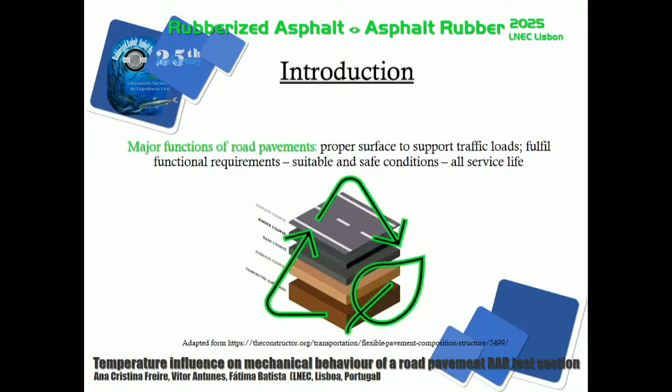Well, just a brief introduction. Everyone here is related to pavement, road pavement, circular economy, etc. But let me say something about it, just to have some connection with all the study. As we all know, major functions of road pavements are to provide a proper surface to support traffic loads and fulfill functional requirements, and of course structural ones also, and suitable and safe conditions during all service life.

So the main goals of our study regarding development and validation of alternative and innovative materials intend to give some answers to an issue that has been present in our lives in the last, let's say, 10, 20, 30 years regarding resource scarcity, environmental sustainability, to explore proper alternatives through the application of recycled aggregates, industrial waste, biomaterials, polymers, in order to protect all the finite resources.

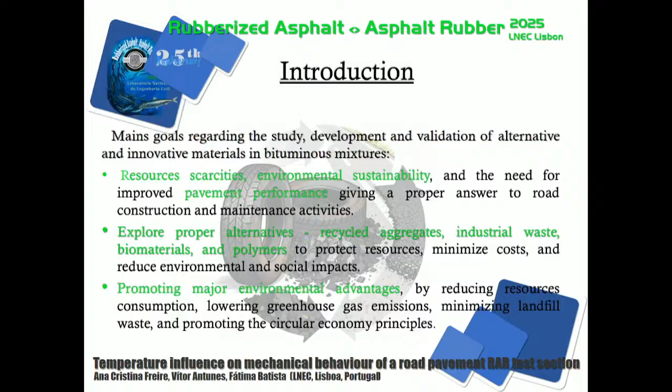That's the issue. So we have to promote major environmental advantage, reducing, that's the main goal, reducing resource consumption, and also, as we have been talking about all these 3 days, lowering greenhouse gas emissions. So we arrived to RAR, the reacted and activated rubber, that is composed of neat soft bitumen, a fine grinded crumb tire rubber, and active fillers. That was part of the mixture that we characterized in this study.

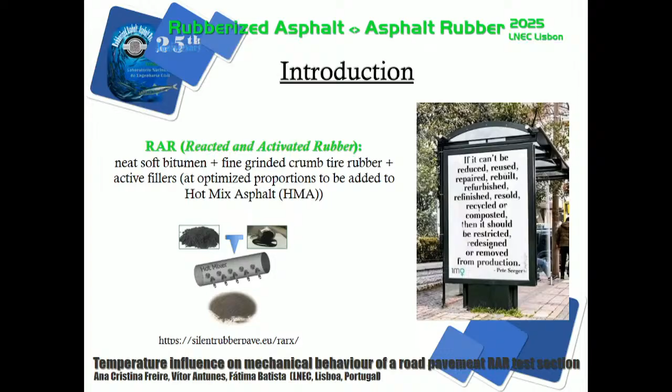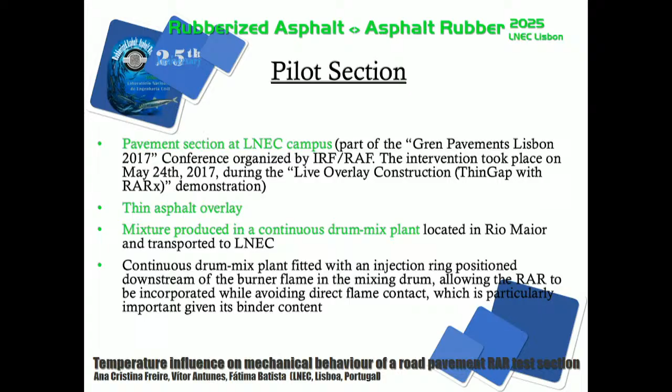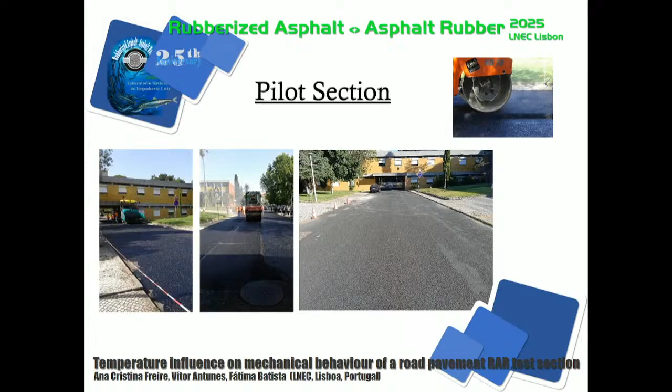So the pilot section was constructed here at LNEC in 2017, perhaps some of you were here during the conference organized by IRF. If you remember, the test section was done outside by Tecnovia at the moment. It is a thin asphalt overlay, and the mixture was produced at the continuous drum mix plant at Rio Maior and was transported, laid down and compacted here at LNEC. And here we can see some moments of that application, compaction here. You have seen it. It still has, as we expected, a very good aspect. All of you can do visual inspection here.

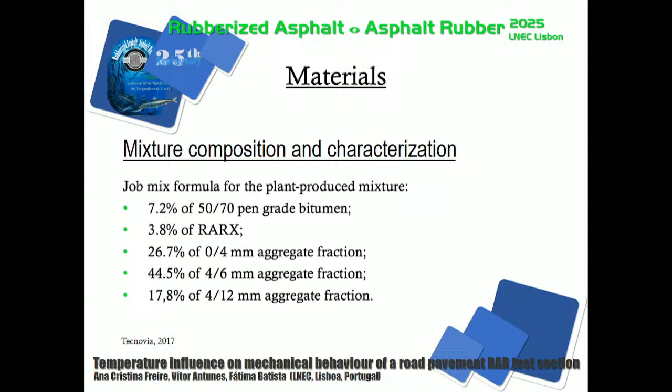And these were the materials that compose the mixture. Here we have the job mix formula. It has 7.2% of a pen grade bitumen 50/70, RAR-X 3.8%, and also three different fractions of aggregates. Those are the characteristics, the grading of the mixture. It was an SMA11.

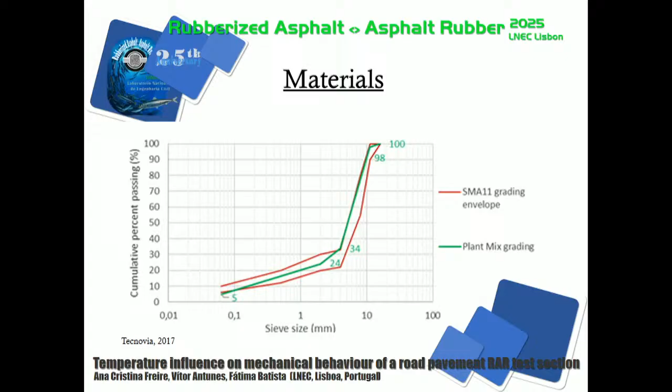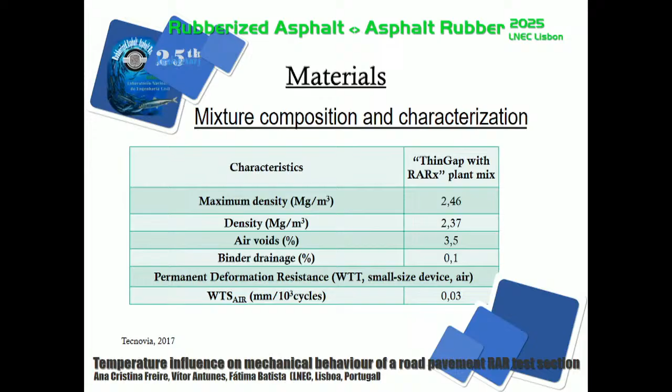And here we present also some characteristics that were provided by Tecnovia during the formulation of the mixture that was applied in the test pit. You have the density, the air voids, the binder drainage, and also the permanent deformation behavior, done with the European standard to evaluate the permanent deformation characteristics. All the mixture has a very good behavior and complies with specifications that are applied in Portugal.

So at that time, in 2017, we extracted a slab, a big one, that was put in our laboratory under controlled temperature, room temperature, and after these years, intending to develop the study, we sawed it in small pieces to characterize in the laboratory, to evaluate the mechanical behavior of the mixture.

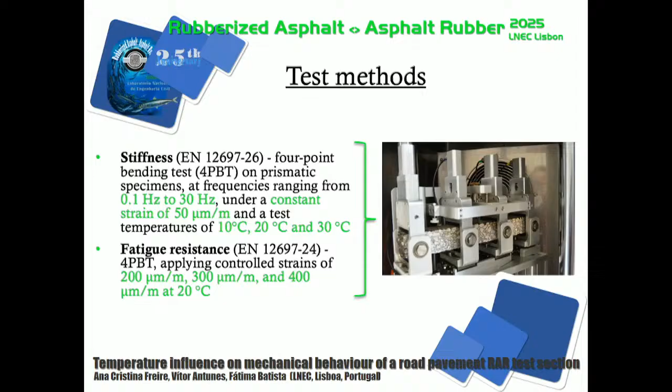So what did we evaluate? The stiffness through the 4-point bending test at different frequencies from 0.1 to 30 Hertz at constant strain and under 3 temperatures, 10, 20, and 30 degrees Celsius. Of course, we also evaluated the fatigue behavior on the same apparatus with the 4-point bending test under controlled strains and at 20 degrees Celsius. These tests are standard tests according to European standards that are referred here.

As a first conclusion, we can see, as we expected, that temperature influences the stiffness behavior of the mixture, and we have better behavior for lower temperature. But this is an absolute analysis, only for our mixture. We also have the phase angle that we can obtain from the laboratory test under those conditions. And related, we see that lower temperatures give us a lower phase angle.

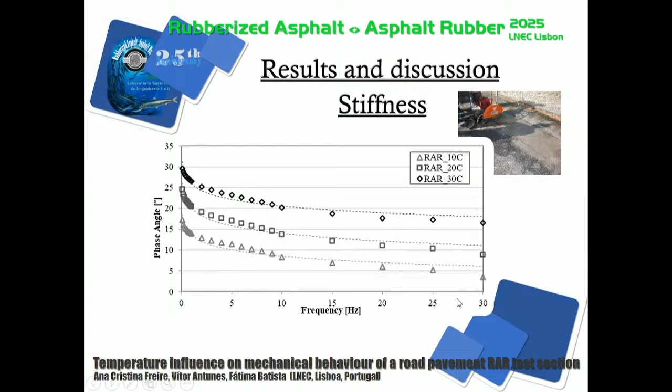But just to have a better analysis of our results, we compare the results with a traditional mixture, AC14 surf, an asphalt concrete mixture applied as wearing course that is usually applied here in Portugal, a kind of mixture for which we have a lot of results, a lot of experience, and we already know or expect a certain type of behavior.

Here we compare under two frequencies of testing. The frequency that we apply to our samples can be related to the velocity of the vehicles that go on the wearing course, and this one is more or less 60 kilometers per hour. And comparing the results, the conclusion is that for the different temperatures, the stiffness of the RAR mixture is better than the one presented by the asphalt concrete mixture.

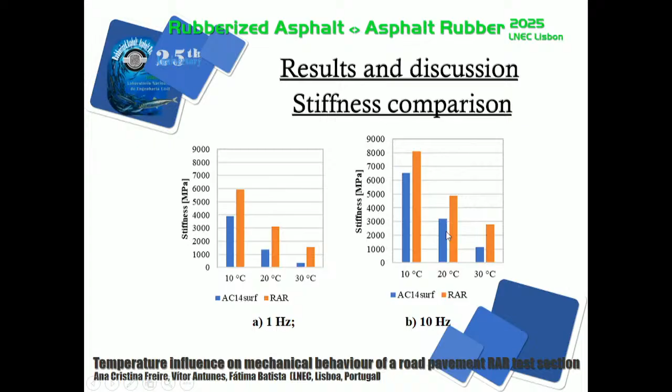So in Portugal, you compare these results to the Portuguese characteristics and specifications. And for us, it is important to evaluate what happens at 30 degrees, you see today the temperature we have outside, and 20 degrees, which is an average temperature that we can have. So we see that there is a considerable difference, with a better behavior for the RAR mixture.

And of course, we also determined the fatigue law for the RAR mixture, and here is our fatigue law. We compared the value that we obtained with those obtained for the traditional mixture, and this one is much better. So it resists better to fatigue conditions, to that kind of solicitation, than the traditional one.

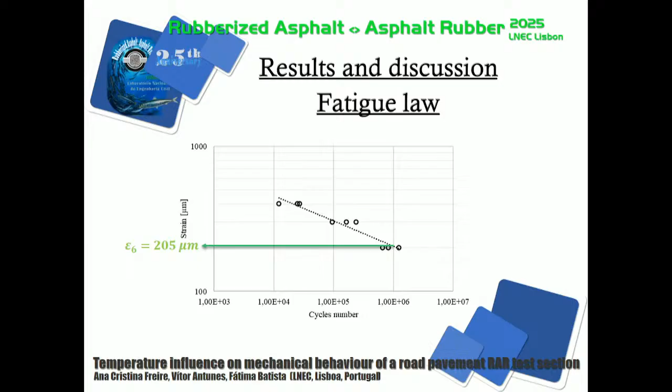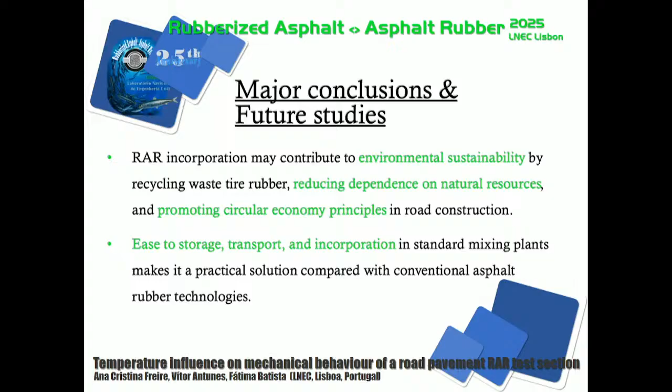So just some conclusions. We can say that the incorporation of RAR in the mixture can contribute to environmental sustainability and promotes circular economy principles. It's a material that we all know is easy to store, transport, and incorporate. And from the study going on at this moment with this mixture, called ThinGap with RARx, we could see that the stiffness modulus decreases with temperature increase, presenting a significantly lower sensitivity to temperature variations when compared with our conventional mixture.

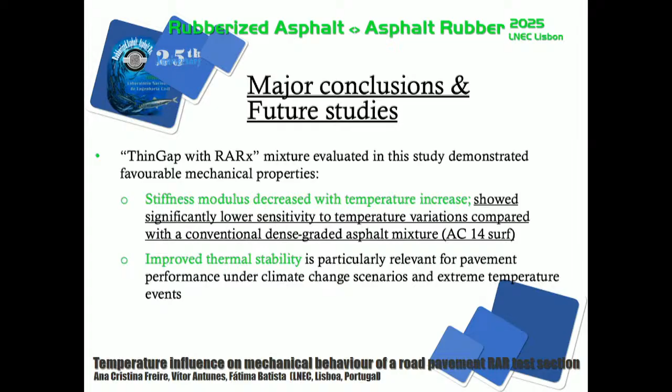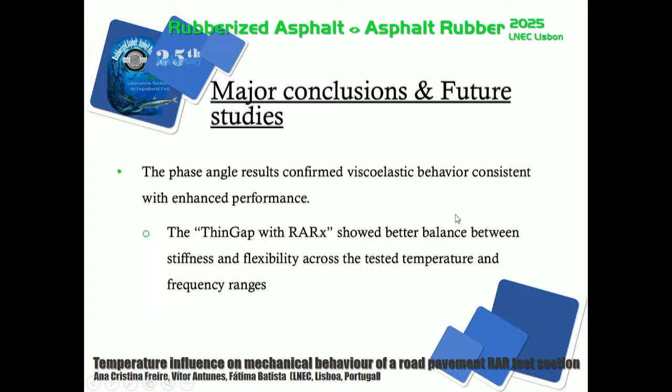And we can also conclude that it presented an improved thermal stability. Regarding the phase angle results, they confirm a viscoelastic behavior consistent with enhanced performance. So our mixture showed a better balance between stiffness and flexibility across the test temperatures that were performed.

And also here, regarding the fatigue law that we presented before, comparing with the asphalt concrete conventional mixture, it shows a superior fatigue resistance and extended service life potential. So a conclusion that we can give is that this kind of mixture with RARx can contribute to a long-lasting pavement, reduce maintenance needs, and have a more resilient infrastructure under climate and traffic conditions.

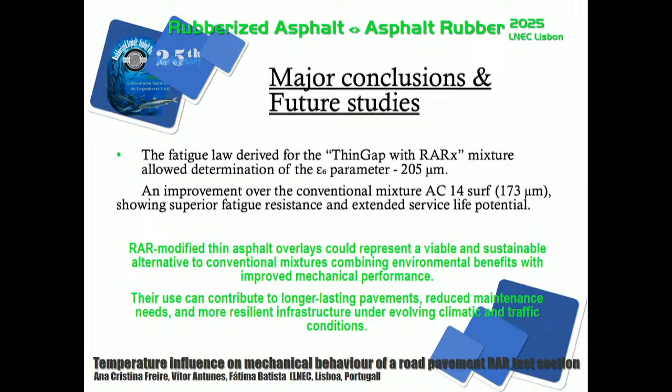So what kind of tests are we still doing, and which aspects do we still need to evaluate and study? The long-term behavior of the mixture, the multi-recycling of the mixture. It's very important that when we add new materials, alternative materials, different from those that we are used to applying for 30 or 100 years, we have to evaluate the multi-recycling potential and possibility so that in 10 or 20 years we can produce new mixtures with the material that at this moment is applied on the roads.

We also intend to evaluate the life cycle assessment and life cycle cost analysis of the mixture, from the production until the application and the recycling again.

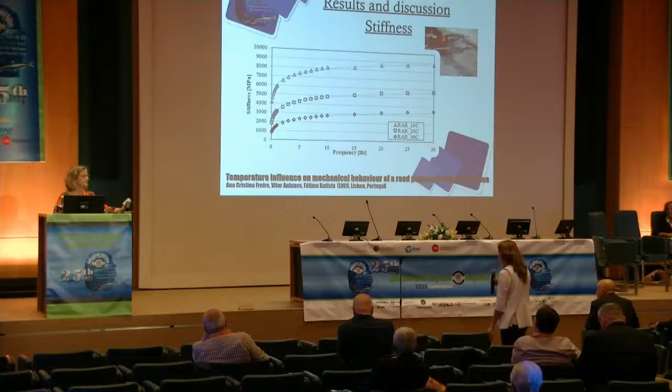I guess you have all the data, so it would be nice to take another look at how sensitive the two are, and then we can report the sensitivity to temperature or frequency change. Further studies, it will be presented. Very nice research. This is just a summary.

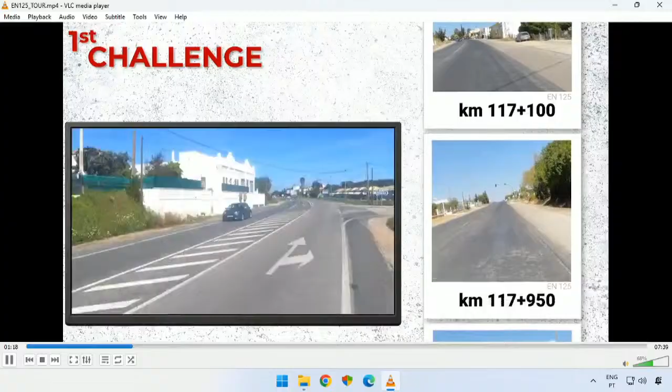We're proud to present a sneak peek and key information about our upcoming Algarve trip. End-of-life tires represent a global waste challenge. Each year, millions are discarded. Traditional disposal methods release emissions and consume resources. But innovation is changing the way we build roads, turning waste into performance. RAR2025, Sustainable Roads for a Greener Future. This is more than a damaged road. It's a reflection of the challenges we face in preserving our infrastructure and our environment. Every crack tells a story of wasted potential, an opportunity for change. Addressing damage like this requires more than just patching and resurfacing. It demands innovation that extends pavement life and reduces environmental impact. The result is a modified asphalt with improved elasticity, higher resistance to cracking and deformation, and superior performance under heavy traffic and temperature variations.

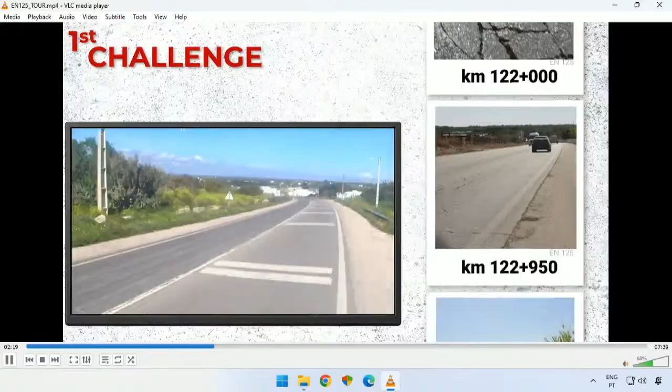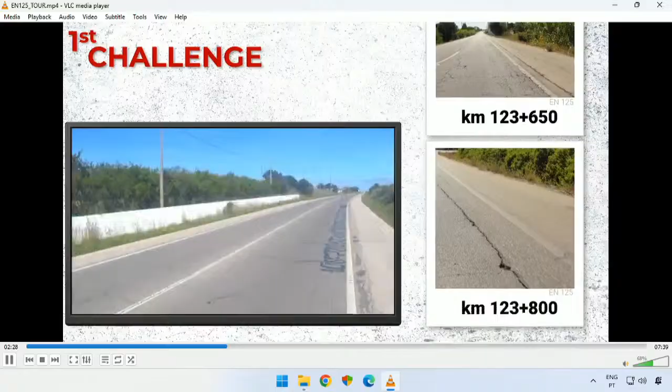This is the reality we find on many sections of a road network. Damaged pavements, cracks, loss of grip, and structural degradation. Each visible defect represents not only a safety risk for road users, but also a waste of resources and energy when traditional repair methods require full material replacement. That's why we seek smarter, longer-lasting solutions with a lower environmental impact. Approaches that reuse what we already have instead of simply discarding it. The use of RAR, reacted and activated rubber, represents a significant step in that direction. An innovative additive that enhances asphalt performance, increases pavement durability, and promotes a circular economy by reusing recycled rubber.

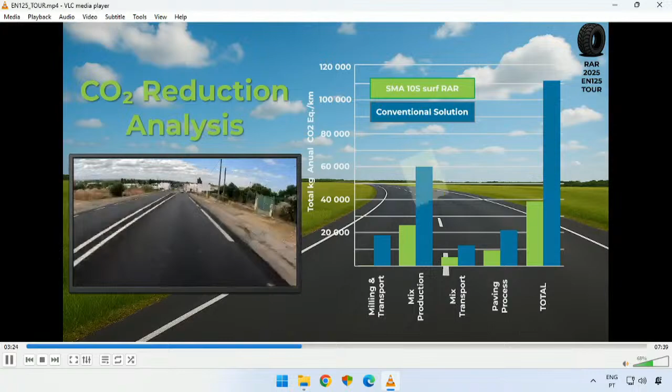CO2 reduction analysis. Milling and transport: the SMA-10S solution generates zero emissions in this phase, as no milling is required. Mix production, transport, and paving: due to the reduced layer thickness, emissions across these stages are approximately 2.5 times lower compared to conventional solutions. Overall impact: when considering the entire construction process, the total CO2 emissions are about 3 times lower than those of standard asphalt rehabilitation methods.

Second challenge in this area, the situation tells a familiar story. Cracking, deformation, and surface fatigue, all signs of a pavement reaching the end of its life cycle. Decades of heavy traffic, harsh weather, and repeated maintenance have taken their toll.

Each intervention has extended the road's life a little longer, but the underlying problems remain: loss of structure, poor drainage, and material fatigue. These conditions are not unique to this site. They represent a broader challenge across many regions, where aging pavements demand increasing resources to maintain acceptable performance levels.

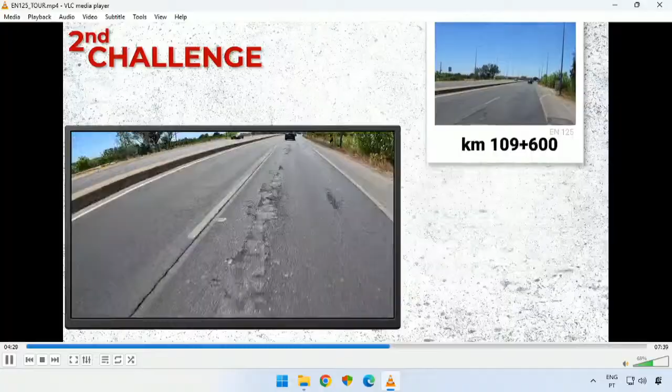Whenever possible, our approach should prioritize environmentally friendly solutions, methods that preserve existing materials and avoid adding more waste to our landfills. In this project, we applied that principle in practice. Instead of removing the old pavement, we placed a new 2.5 centimeter layer directly over the existing surface.

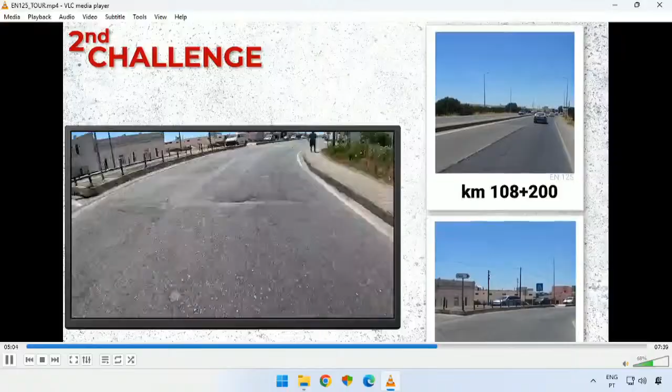This approach minimized material consumption, reduced transport and emissions, and extended the life of the original structure. It's a simple yet powerful example of how smart engineering can deliver both performance and sustainability, protecting resources today while building better roads for the future.

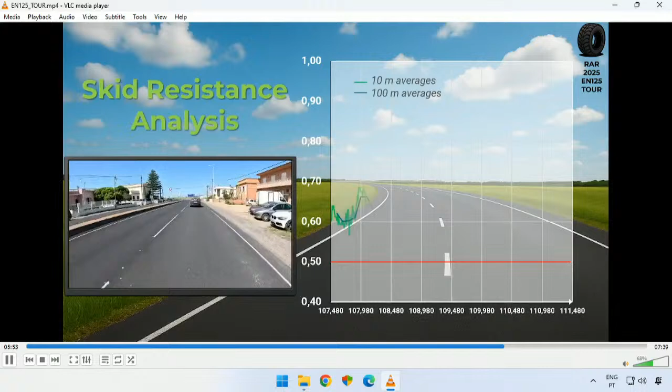After completing the work, a detailed performance evaluation was carried out to assess surface conditions. Friction tests were performed in both directions and on both lanes, left and right. The graph shown here is presented as an example of the left lane in the increasing direction, but the results obtained on the other lanes were very similar.

Measurements were taken using ASFT equipment, and the data was converted to SCRIM values for standardized comparison. The results show consistently high friction levels across the section, confirming excellent surface texture, grip, and uniformity. This proves that the pavement delivers safety, durability, and consistent performance, even under demanding traffic and weather conditions.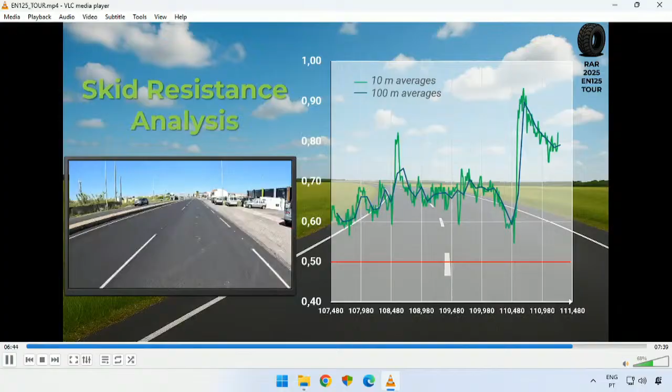Overall, this project represents a clear success, combining technical excellence, sustainability, and long-term performance in one solution. RAR, delivering results that stand the test of time. Over the past 2 years, we've completed 2 major projects, one in 2024 and another in 2025, both proving the efficiency, performance, and environmental value of the RAR technology.

And the work doesn't stop here. More sections are already underway this year, continuing our commitment to building better, safer, and more sustainable roads. These projects are more than construction. They're a statement of innovation, responsibility, and progress. So as we set off on this road trip, we celebrate what's been achieved and look forward to the journey ahead. RAR, engineering performance, protecting the planet, and to everyone joining us on the road, safe travels.

Well, one piece of information for you about AI. This video was done by Flip using AI; it's the first ever presentation he did with voice and using AI. It's amazing, isn't it? I think it turned out to be very good.